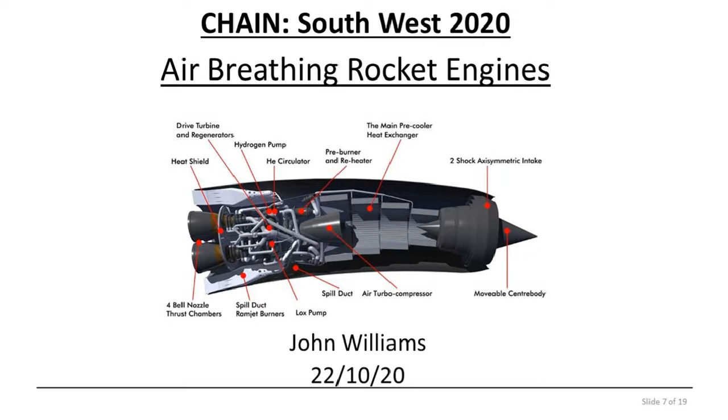So yeah, as I say, it's been a great learning experience, but some of my advice would be for younger people: if you find a company you want to work for, just persevere. It took me about 6 months to get my job at Reaction Engines, and I've enjoyed every minute of it.

Reaction Engines started with these guys: Alan Bond, Richard Varvill, and John Scott. John Scott sadly passed away, but Alan and Richard are the most knowledgeable and nicest people you could ever wish to work with. So they're my engineering heroes.

There's some pretty good stories about Alan Bond when he was a boy. One is that he blew out his mum's kitchen windows making rocket fuel in her oven. Another is a newspaper article about him owning rocket fuel he'd made himself, and the police were threatening to fine him like £100 a day, which was a colossal amount back then.

So Reaction Engines was founded to carry on the work of HOTOL, which I'll get to later. But first...

Why would you want an air-breathing rocket engine? Well, one of the big reasons is you could save mass. Liquid oxygen is pretty heavy, so in a typical launcher like Saturn V, 85% of that mass is propellant, and most of that propellant mass is the oxidizer. So if you can use the atmosphere on your way to space, that offers a great possibility of saving mass.

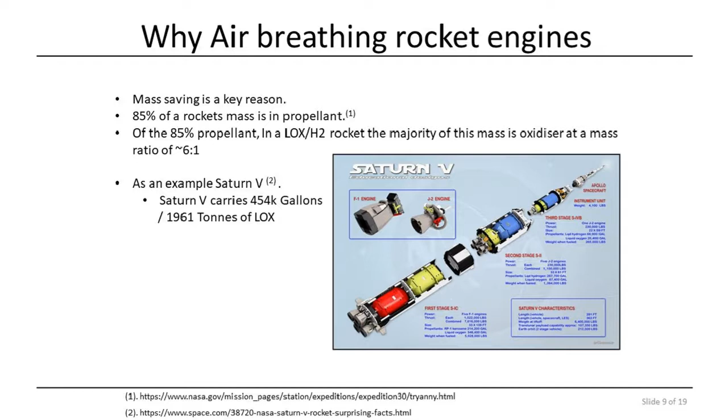There are other forms of high-speed flight, but importantly, not all of them can start from zero. Scramjets and ramjets can't start from zero, and that's where Sabre comes in. It's got the efficiency of a turbojet but the power of a rocket.

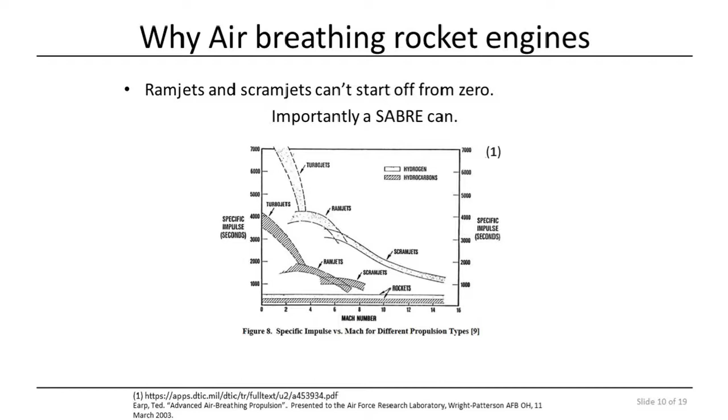Although you might be able to save all that weight, you've now got to exchange it for more complicated hardware - from tanks to heat exchangers and pipe work to turbo pumps and things like that.

This is where Reaction Engines is expert at developing ultra-lightweight heat exchangers. If you go on their website you can see about HTX, a hot test experiment heat exchanger - there's more detail there, but this is the test rig. The hot air comes in on the right hand side, comes in diagonally, spills out radially into the heat exchanger, then out the front on the left hand side.

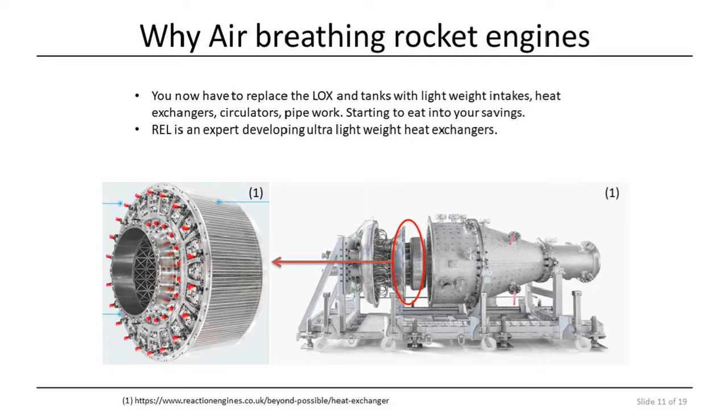So the history of air-breathing rocket engines goes back to the 1950s and 60s, and it started with the LACE engine. The critical point about the LACE engine is that it liquefies the air, whereas, as we'll see later, the Sabre doesn't.

One of the interesting things is that to liquefy the air, you need more liquid hydrogen to liquefy it than you can burn in the combustion chamber. So you end up wasting a lot of liquid hydrogen, which isn't a good thing. There's also no pre-burners, which we'll come to later.

In this simple diagram, which I've stolen from Bob Parkinson - he's also involved with the HOTOL project - there's no pre-burner, so you can't start from zero. And there is something magical in this engine: the oxygen separator. I'm not sure anyone in the world knows exactly how that works or how it could be used to function in such an engine.

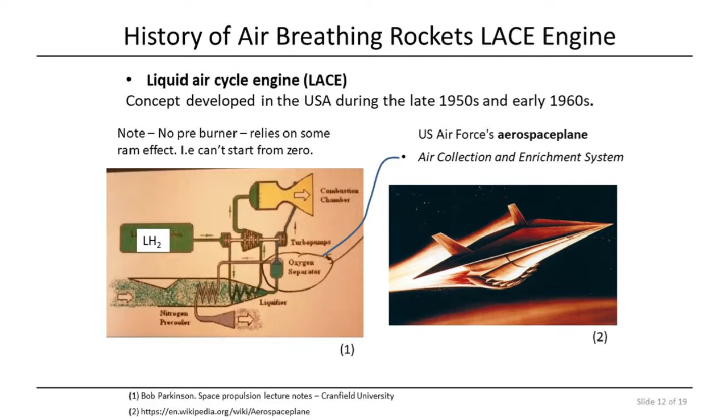But who knows what the Americans have been up to since. Anyway, this engine was designed to go into something called the Aerospace Plane, their single-stage-to-orbit system - a single aircraft to orbit, instead of throwing away rockets like we do at the moment.

Right, so if you fast forward 20 years, we come to the HOTOL project.

So I'm just going to get a drink.

The HOTOL project was a project by Rolls-Royce and BAe, and this is where Alan Bond comes in. He designed the RB545 engine, and you can see the patent for it.

The patent drawing's pretty difficult to go through, so I won't go through that, but you can see the illustration of the space plane. This ran from the 80s and finished in 1989 when the funding ran out. Bob Parkinson, who I've been getting the diagrams from, Alan, Richard, and John Scott all worked on this. One of the big problems they faced was the icing up of the heat exchangers.

I guess they hoped that wouldn't happen, but unfortunately it did, and that blocks the airflow from coming in. So once that happens, the whole thing falls apart. The other thing to note is that not liquefying the air means you can save on the amount of hydrogen needed, by about half. So there's a big saving there.

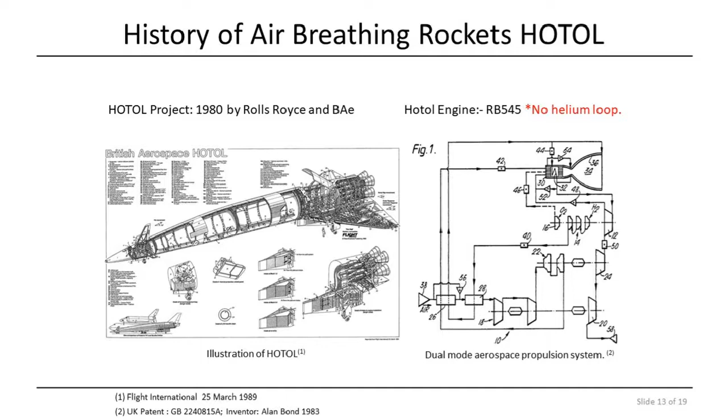This diagram is a little easier to understand, again from Bob Parkinson. It's quite hard to find things out about HOTOL, partly because it's so long ago, and partly because it's shrouded in secrecy. Some of the patents are still non-public, but I guess everything I'm showing is in the public domain.

One way to think about this is to remember it's a dual mode engine. Air breathing is one mode, and rocket mode is the other, which is this LOX tank. That gets activated when you're traveling to outer space and start running out of air.

To understand the engine, it's almost easier to ignore that for the moment and look through the diagram where the air comes in at the bottom. It gets compressed. Some of that air goes to the pre-burner, and some goes to the combustion chamber. With the liquid hydrogen, all of it goes into the pre-cooler through a heat exchanger, and then turns the turbo machinery and then into the pre-burner itself.

As that ramps up in heat, that starts driving the machinery. You can see some of that hot hydrogen getting mixed up with the engines here. The hot hydrogen can then run the air compressor. The thing to note is that the pre-burner runs fuel rich, so it gets heated in the pre-burner, and then it gets ignited again, the fuel that's not been burnt in the combustion chamber.

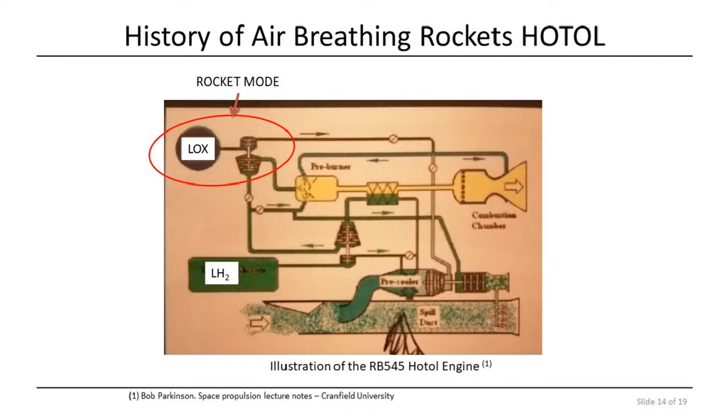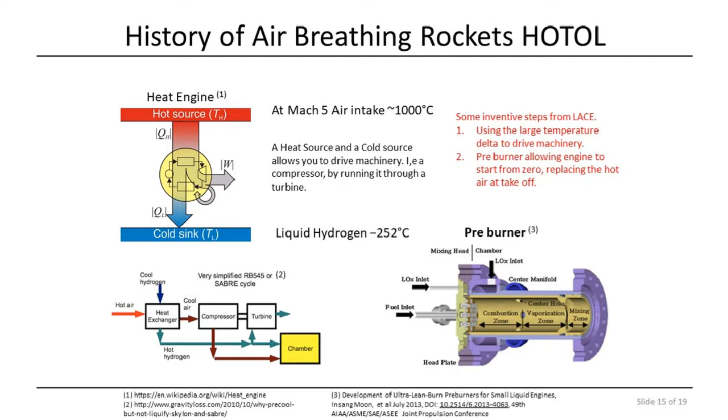So jumping forwards a little now, we get to the Sabre 3. This is probably about 7 years ago when I started. One key thing to note is Sabre 3 means there's more than one of these types of engines, which is kind of exciting. So if anyone feels brave, they can go away and try to think of better ways of organising a Sabre engine tonight.

You could, for instance, instead of putting all your liquid hydrogen into a pre-burner, try to divert it into a rocket engine. But the advantages of the Sabre cycle from reaction engines come about for two reasons: one's to get over some of the patent issues, but they also introduce the helium loop. The helium loop is a good idea in one respect, in that you're avoiding hydrogen embrittlement, which is a big problem, and you're also avoiding hot air contacting hydrogen, which is explosive. But then you've also got the difficulty of another loop in the system.

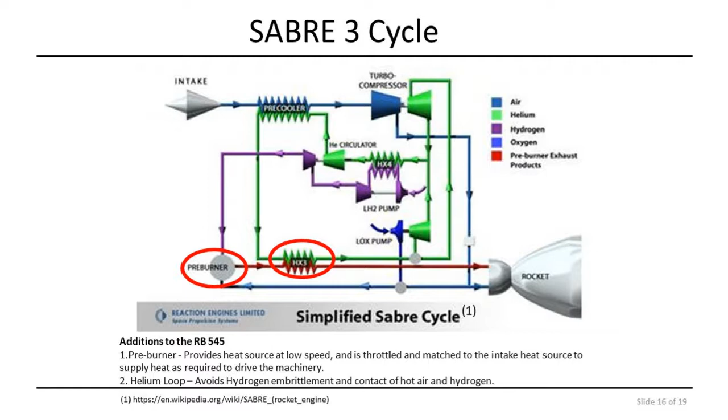So let's talk about some of the challenges. The state of a typical rocket combustion chamber might want to run at 140 to 200 bar for the state of the art. And the state of the art turbo compressor, like a Trent 1000, has a 50 to 1 compression pressure ratio. So you can't stuff the air from a conventional turbo machine into a rocket chamber very easily. Otherwise, you're going to have to run at lower pressures.

So one way around this is to have two combustion chambers. On the left-hand side, you can see at 42 is one combustion chamber, and at 32 is the other combustion chamber. So you could have one as air breathing mode on the outside, for instance, and one as rocket mode on the inside. In air breathing mode, you've got an inside-out type nozzle arrangement. And then as you're going into outer space, you transition to rocket mode.

One of the neat things about this is, as you go up in altitude, the efficiency of your rocket nozzle changes. So one way to combat that is to have a change in rocket nozzle geometry - the higher you go, the bigger nozzles you need. And that solves that problem in one go. This is actually a patent of Alan Bond and Helen Webber, owned by Reaction Engines. So if you go online and look for Alan Bond patents, you'll find quite a lot of the secrets in there.

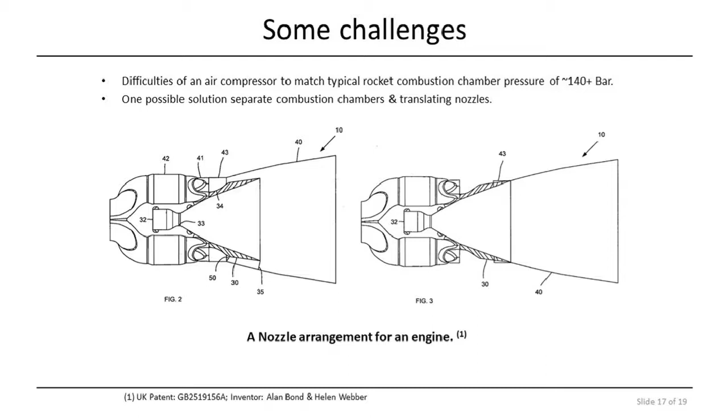So some of the other questions you normally get asked is, is there any other applications? Again, before my time at Reaction Engines, there's the LAPCAT project, which was run with ESA. You can imagine it as the Sabre engine, but without the rocket mode part - without the liquid oxygen tanks. The headline of this is a Sabre type engine in air breathing mode can go to Sydney and back, London to Sydney, in something like 4 to 5 hours.

And the thing that I like the most about it is it's not a direct flight. You travel over the North Pole, down the Pacific, and then you pop out at the South Pole to get to Australia, which is pretty neat, pretty unusual.

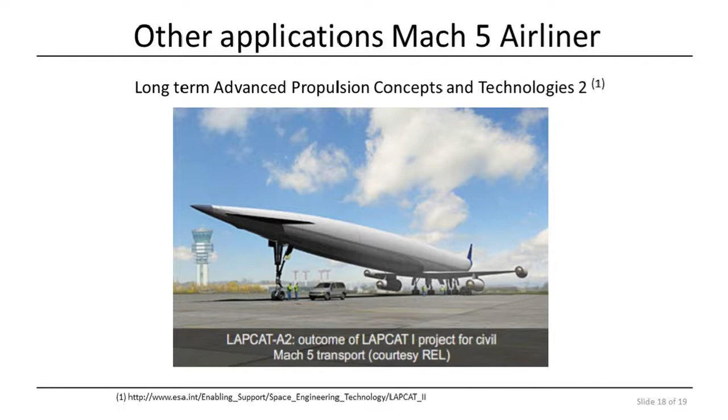Having worked at some high-tech development projects, you start wondering how it should be done and what's the best way of doing it. I'm not an Apple fanboy, but Steve Jobs does say a lot of good stuff, some of it quite controversial to the standard big aerospace type model of how things are run. It's the obvious one, but hire great people. The other thing he says is hire great people that don't need to be managed - you just let them get on with it. That was really quite what Reaction Engines was like when I joined. You just got on with the job, which was brilliant.

The other thing is you can change people's knowledge, but not necessarily their attitude. So it's more important to get people with a great attitude, because they'll go and learn what they need to know anyway, than to have people that are difficult to work with. Because at the end of the day, no one knows everything - we've all got to work as a team. And this is the other thing, a diverse team. When we looked for people, it was always important to have people with different backgrounds, because if everyone was like myself, they would have had no manufacturing experience and we would never have been able to build anything. So it creates a culture where you can learn a lot from each other, which is really enjoyable to be in.

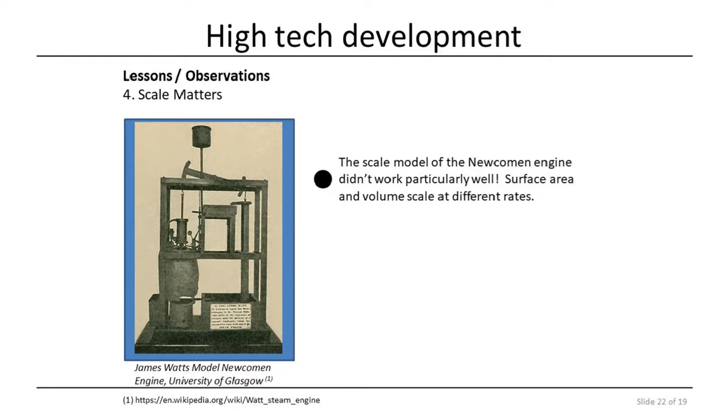And following on from that, quite interestingly, turbo machinery doesn't always scale well. This is a Balje turbine chart. You get the same thing for a compressor, but depending on the size and scale and thermodynamics of the machine, you could, for one instance, be looking at a radial machine, and the next instance be flipping to an axial machine. So you totally change the architecture of your machine.

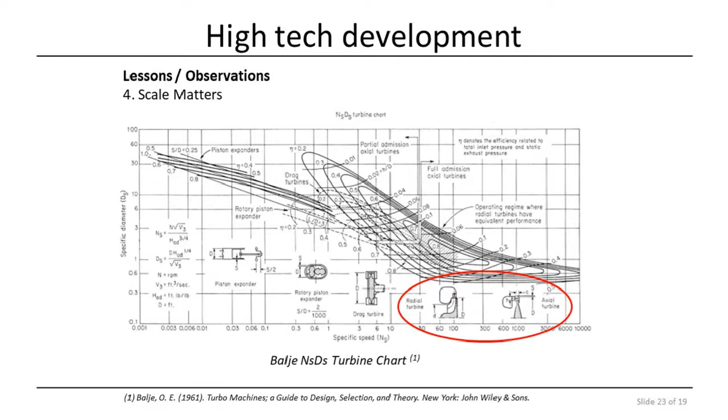Which I find fascinating, and I didn't expect that, but that's something I've learned whilst being at Reaction Engines. Right, so that's pretty much the end of my presentation.

So this will all be made available offline or after the show, but the Three Rocketeers documentary I could highly recommend. That would be able to tell you more about Reaction Engines than I can and give you a better overview. I've probably watched it about 5 times.

There's quite a few Alan Bond lectures that you can find on YouTube, and the Steve Jobs hiring advice, which is fascinating because it's almost in the face of the normal establishment of the way it's done now in big companies. But he's managed to do it in one of the biggest companies in the world.

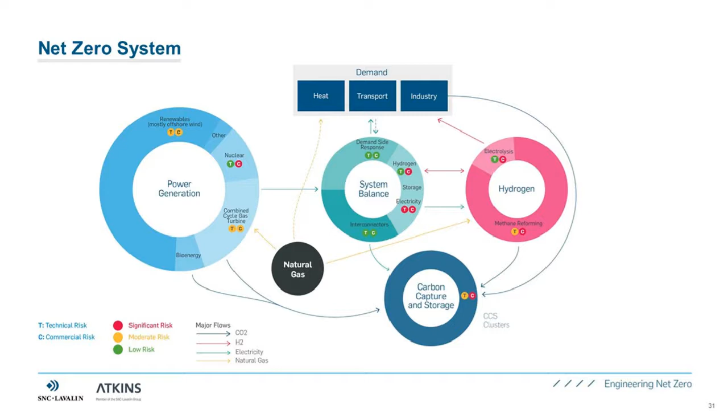Electricity generation headlines for the 2050 system: there's an approximate doubling of the annual generation output of electricity. In fact, that means a quadrupling of low carbon generation output. And on peak demand and installed capacity, you're looking at an approximate trebling of the numbers from today's system.

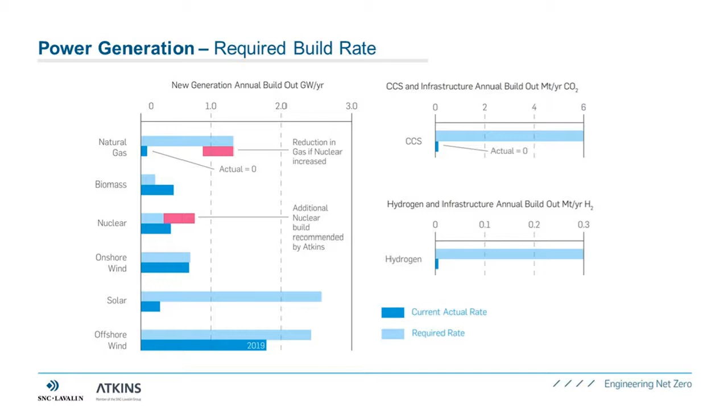But anyway, there's a level of detail to the assessment which hopefully allows some practical decisions to be made in a more informed manner just by what we've been looking at here. And I think on the next slide, it's also important to note that when we look at a system and model an optimised system, that also includes a cost element to both build and to operate.

And generally, what we see in generating sources today is a consideration around levelized cost of electricity. And that's the term which is used to peg the production values and sort of the potential government support values for offshore wind or for nuclear.

Now that LCOE is equivalent to the cost of electricity at the point of generation, and it doesn't allow for a comparison of apples with apples, as it were. And the reason why it doesn't is because it doesn't actually account for balancing costs and system impacts at the point of use. So it's at the point of generation and not at the point of use.

Which is why we would be really keen to see the discussion around optimized costs for various technologies framed around the whole system costing approach, because although it can be quite challenging to actually develop those costs for various technologies,

a lot of work has been done around it, and what it does demonstrate, as shown in the diagram or graph on the right hand side, is that actually where there might be a broad consensus that offshore wind is significantly cheaper than nuclear, for example, if you start to build in some of the costs and the risks associated with each technology, then the costs actually start to, at a whole system level, look a little bit more comparable.

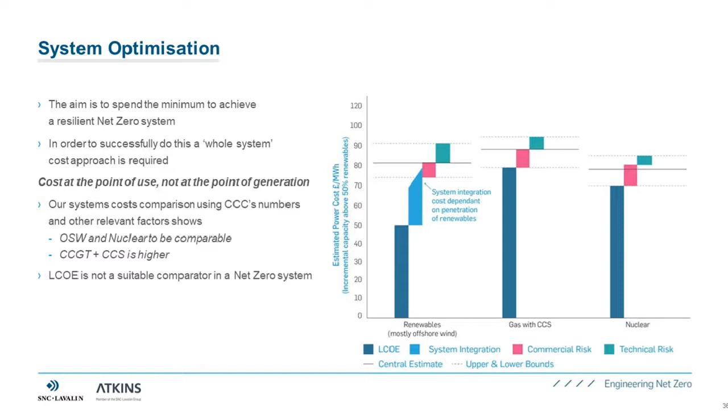And I think that's whilst the graph here is not an exact science, I think it does start to provide that general steer on the debate. So it's one which we're keen to promote.

Trying to get a coordinated approach to understand what the impacts of a decision made in domestic heating might have on energy demand or hydrogen production, for example, is something which at the moment isn't coordinated. And so we would propose that there's an overarching body of some description, we're calling it the energy system architect, to act in that function, to provide that overseeing, coordinating, plan-setting approach.

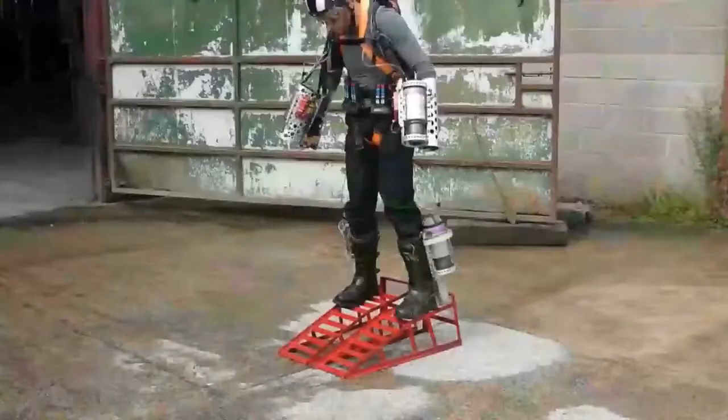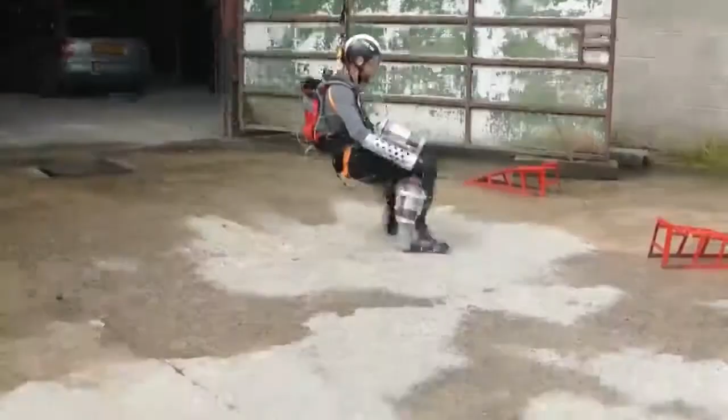I hope you're enjoying the jet noise - it's probably quite loud coming through. I've got the owner who helped organise a lot of this telling me on WhatsApp that it sounds a little bit loud, but I guess it's really loud in person, so it's quite an accurate reflection.

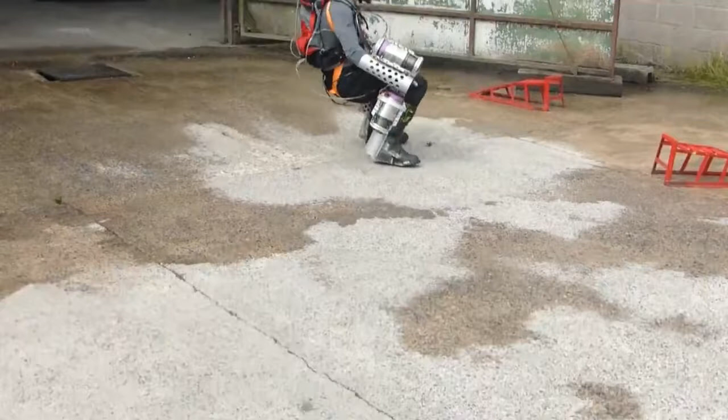Now, if you noticed, he was swinging around on a tether. That was a nice idea, but in practice it was a bit like trying to learn to ride a bike with stabilizers - great to a point, it means you don't fall over, especially on concrete, but it creates this extra vector that's really hard to deal with, and it's really hard to learn to balance without it tugging away on you.

Now, you've noticed that we've put them on our legs. This worked pretty well, and we made a lot more progress like this. Looks a little bit silly, but we're getting there - look at the dust being kicked up. That's painful to look at now.

I'll skip through this one as well. This is with 2 on each arm, 1 on each leg again, sorry. And progress is looking really good.

And this journey - we never set out to try and build an Ironman suit, but it's quite uncanny how similar that footage looks to some scenes in the original Iron Man film.

Now this next video is kind of where the whole journey turned from just a group of mad people in a farmyard to 'oh my God, this might actually work.' This is the first 6-second wobbly-legged flight.

Which you can kind of tell he's pretty delighted with. So from there, where do you go? We moved those 2 leg engines, which were a pretty bad idea looking back on it, up to a single rear engine that lives in a backpack on the back, where your fuel and all your electronics are stored. And we kind of iterated and iterated.

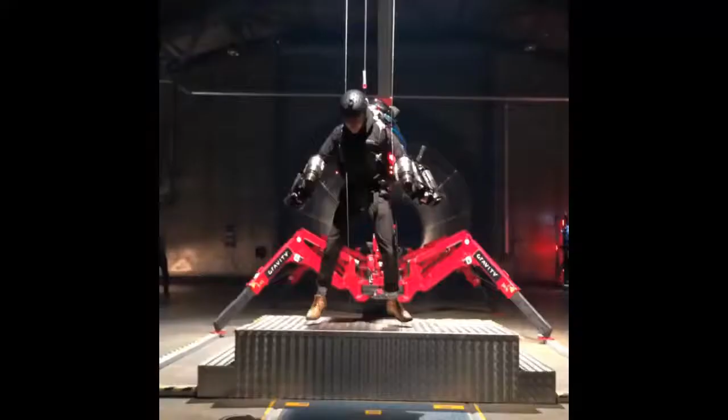But my first attempts were a little bit less promising. I wasn't taken off the tether for a while, and there's a lot more swinging around. What you can almost see in the back is my colleague Lee pulling on the safety tether, pulling me up just so I got a bit of airtime. I was not ready for the amount of thrust. You can kind of see from there, my arms are nowhere near like Ryan's.

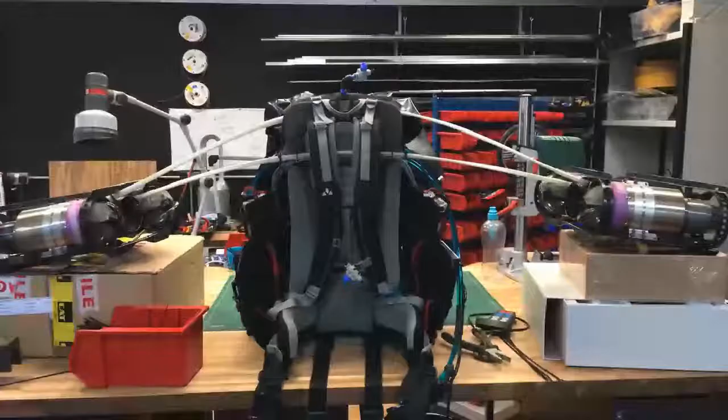So how do we solve the strength problem? We started in the same manner as we started with the first jet engine strapped to the arm - went back to basics, went back to the early arm mounts, and started hacking together random prototypes of things we thought might help.

So when you're trying to hover, you're actually holding the arm engines out to the side. So if you need a little bit of force to hold them out, why not use flexible tent poles attached to the top of the backpack, zip tied and drilled in place to the arm mounts? Didn't really work. We tried crutches.

It kind of worked, but this was similar to learning to run but with your legs splinted. You need a lot of fine control. You need to be able to move your elbows even a tiny, tiny amount.

Now, you control flight by moving your arms around and vectoring that thrust. So if you're lifting your arms out to the side, you're taking the full weight - 5 or 6 kilos of weight up to the side. And after a while, that does take its toll on your shoulders.

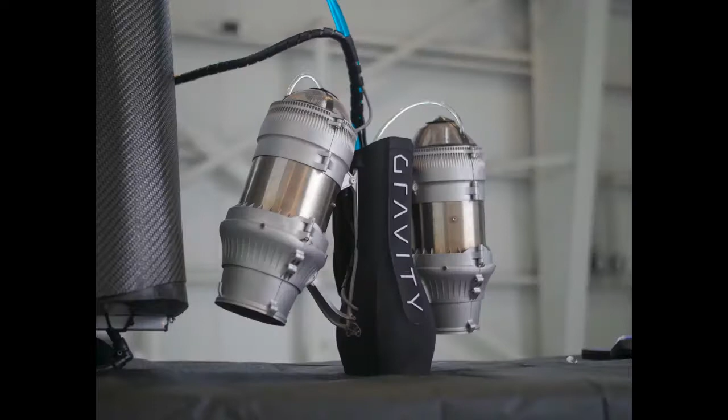So we solved the strength issue, and we couldn't just use those random bits of aluminium to fly at all these events around the world. So we designed - mostly down to Sam, I call him my engineering wife, because between the both of us we do a lot of the rough early work, and we bicker just like a couple. He's an amazing CAD designer, and he works on turbopumps and rocket engines and all sorts of amazing stuff. This is the first generation of arm mounts he designed.

So the arm tube in the middle, the black thing, that's made entirely out of SLS nylon. And then you can see the engines, the shiny steel looking things, are sat inside aluminium clamshells. Now, all of this is fully 3D printed in metal.

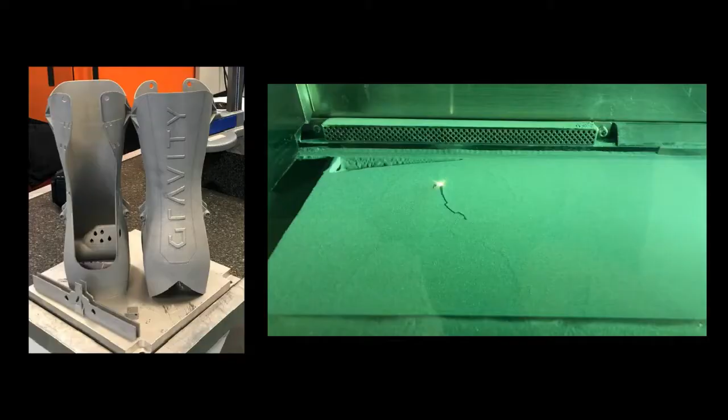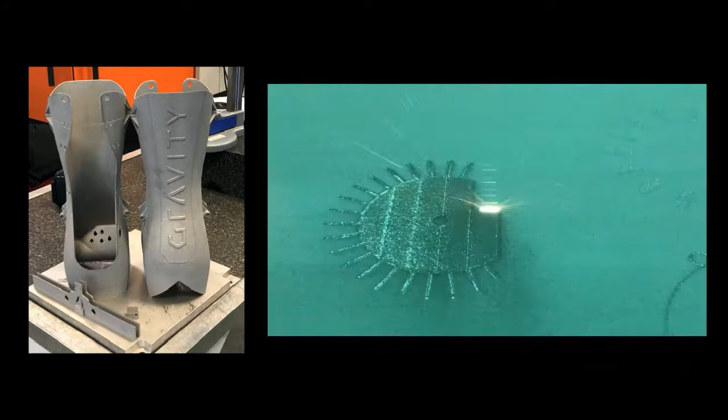For those who've never seen what it looks like, it's a really satisfying process - admittedly it takes days for something like the thing on the left to appear. You have a bed of powder, and you fire a little laser over it, turns it into a nice solid sheet, then you add a bit of powder on top and build it up layer by layer. Pretty cool process, not cheap whatsoever - the arm mounts on the left, the fully completed ones, cost about 35 grand. Pretty nuts, but there's no other way of creating such complex geometry that we've discovered, especially at a small scale.

At this stage, the person training you had no way of, I mean this is just me and Richard and a few others, so it's kind of down to our own risk, but we had no way of remotely shutting them down. So if they kept drifting up, they'd just bump around on the ceiling for a bit and run out of fuel and come down. That was what we thought would happen. We never tested that, of course, and now we have a remote kill switch, so if people start to drift a bit too high, we can bring them back down to earth.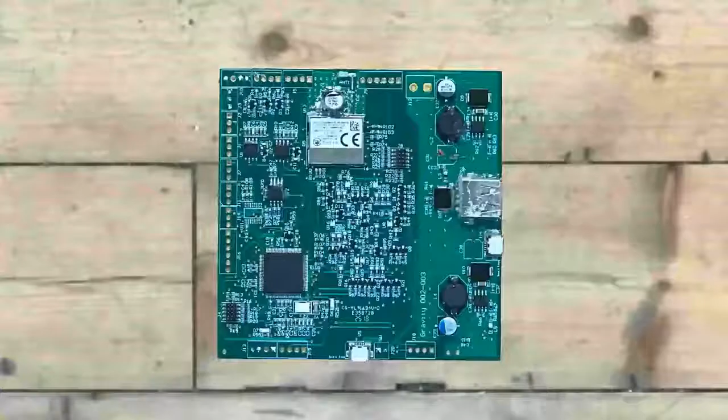This was the old control board, really fancy, amazingly complex. It could do heads-up display monitoring, telemetry, RPM sensing, how much fuel you've got left, and loads of amazing things. But it didn't do one pretty important thing.

It couldn't change the thrust as you're flying, which is now pretty essential. So instead of going back to the company that developed this board and spending a lot of money developing a brand new one from scratch, I thought, with my experience playing around with Arduinos, why not just try and make our own and see what we want out of a system anyway.

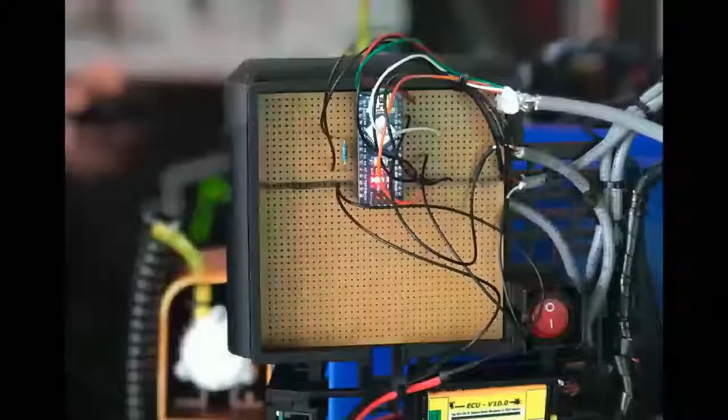Those of you who've done Arduino stuff might recognize this. This isn't even a real Arduino Nano, it's a fake one, about £3 off Amazon, with a load of spaghetti wires soldered in. After a bit of YouTube tutorials and teaching myself about PWM and how to make faster PWM, we made a control board. It worked, but we didn't want to test it on humans straight away, especially that mess.

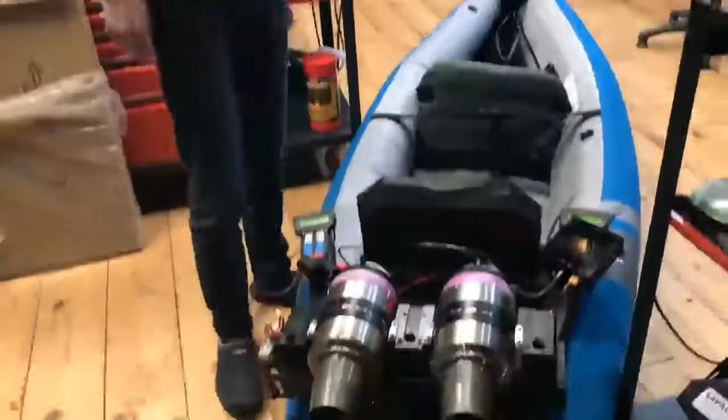It doesn't exactly look flight safe, so we put it on something a little closer to the ground. We made a jet engine powered kayak, in a little box on the right there, and took it on its maiden voyage. Luckily, one of our colleagues is ex-Navy and had all the right gear, so we had a little ceremony smashing champagne against our inflatable kayak. But it proved it worked.

But of course we couldn't use an Arduino for something we were going to go around the world doing demos for. It's wrong in every sense. So with a little help from electronics engineer friends of mine, I taught myself how to design PCBs. My dad was a massive help too, since he's an electronics engineer and knows all about this stuff.

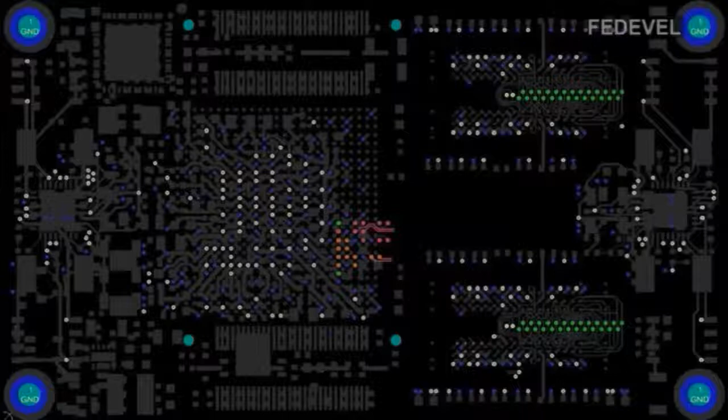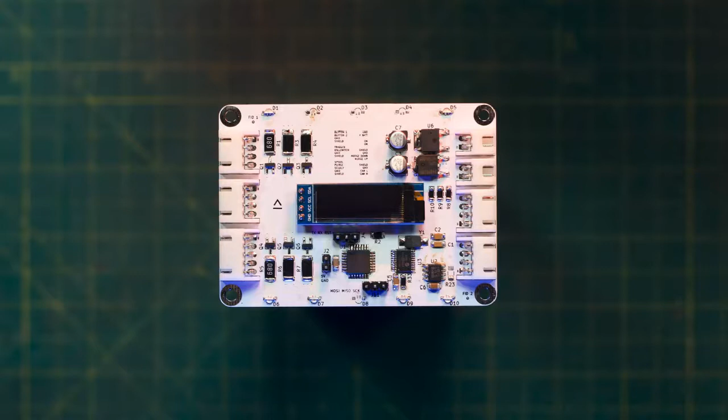For those who don't know what PCB design looks like, it's great - it's literally like one of those games of join the dots. You place all your components on a board, join all the little lines, then hit print, or order, and it comes through all joined up. This is a bit more complicated than the one I made, but I didn't record that. This is the board - super simple, very few things that actually need to be doing anything, but it's a lot more reliable than the Arduino hardware, and written in a more solid code base.

Ultimately it was all done relatively cheaply and in-house, which is really nice, and it meant we could do so much more dynamic flying. Being able to trim the power up and down by a couple of percent was a massive help. This next video, I'll have a little rest from talking - it's one of the flights we did out in Portsmouth, off what I think is a P2000. This one was called Dasher.